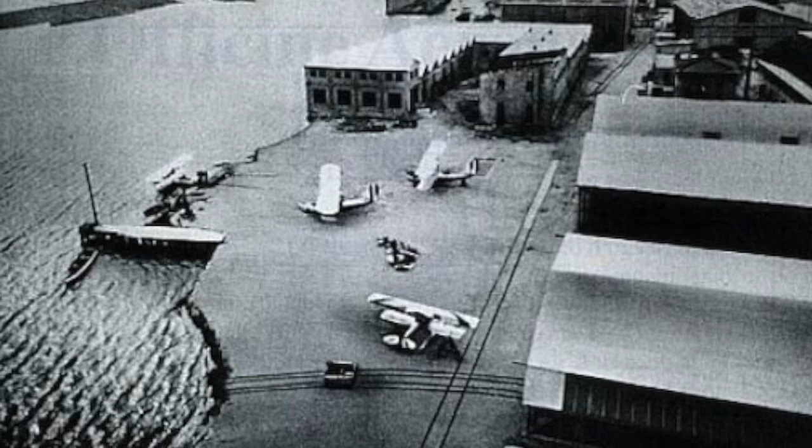The Cant 1007 had an extremely efficient wing, with refined aerodynamic lines and exceptional fuselage connections. Engineer Zappata had worked on other projects before the Cant 1007, all of which were made of wood and always of exceptional quality. At Cantieri Riuniti dell'Adriatico, a small aircraft manufacturer but fueled by top-level technicians, workers, and designers, he had designed excellent aircraft such as the Cant Z501 and the Cant Z506.

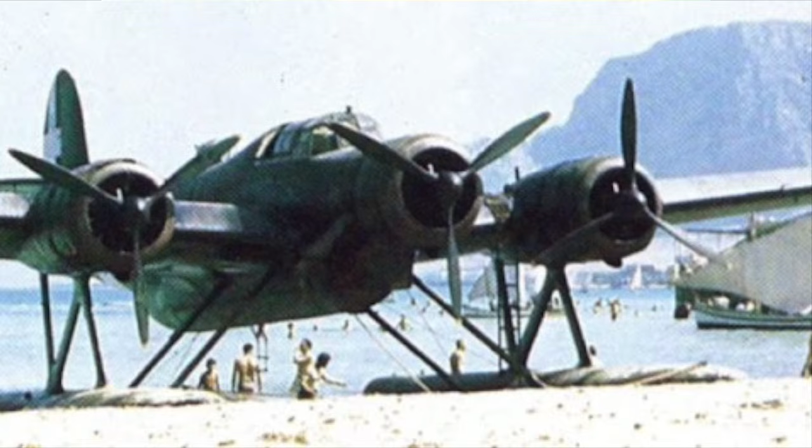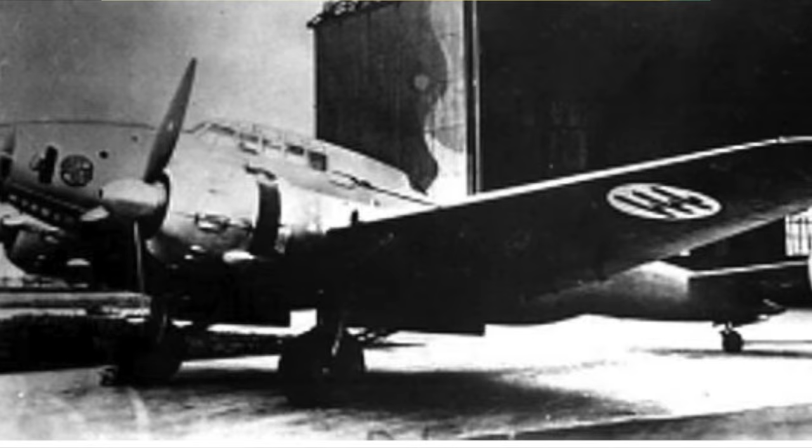The Cant Z1007 was an aircraft that exceeded 13,000 kilograms at takeoff, with a bomb load exceeding 2,000 kilograms. But Zappata had also applied himself to metal construction, again at Cantieri Riuniti, developing two exceptional aircraft, the Cant Z511 and the Cant Z1018. The aircraft took shape in the experimental section of Cantieri Riuniti, while in the Aeronautica Seconda shed the wooden construction techniques that would be used on this multi-engine aircraft were refined.

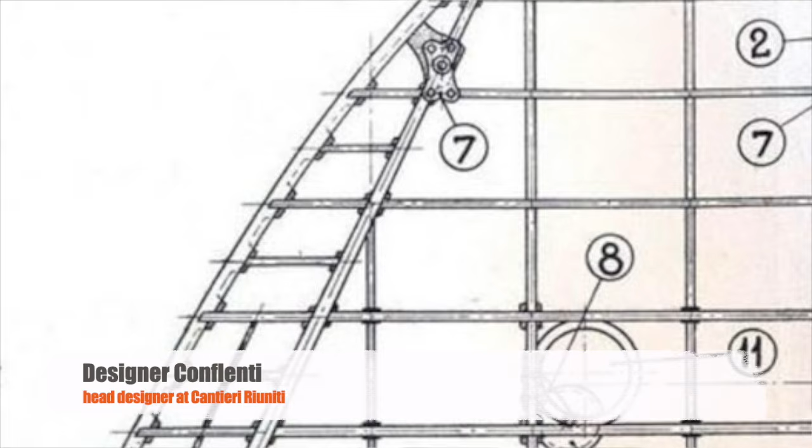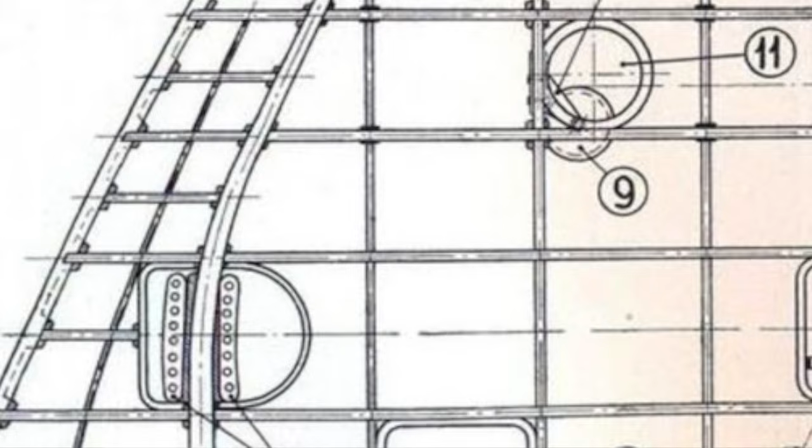Zappata had already worked at Cantieri Riuniti in the 1920s as engineer Conflenti's assistant, immediately after the company's aeronautical design division was founded in 1923. He left a few years later, returning in 1933, enriched by further extensive experience, especially abroad, and, most importantly, now as head of design. The Cant 1007 was a low-wing, three-engined monoplane with a wooden structure.

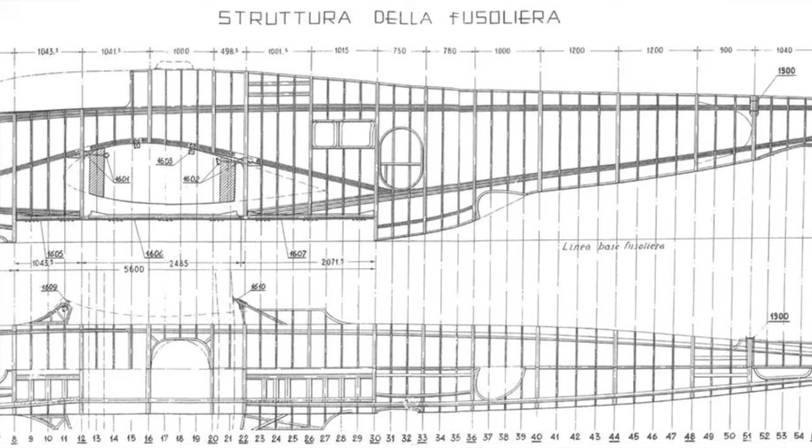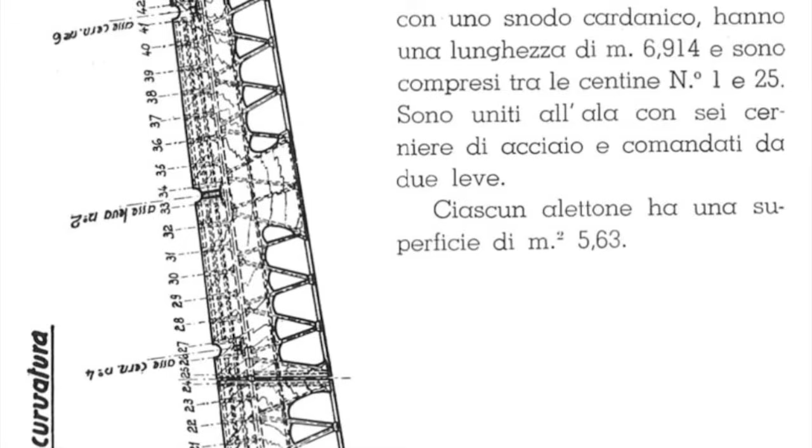The fuselage had an elliptical cross-section, made of wood with tulipwood slats. The two pilots were seated in tandem, to reduce the fuselage's cross-section and improve its aerodynamics. The wing had wooden spars and plywood skinning up to the rear spar. The entire wooden structure was covered with varnished canvas, including the ailerons and flaps, also made of wood with varnished canvas covering. These flaps had been specifically designed by engineer Zappata and were very well developed, allowing for very easy landings, even at steep angles of descent.

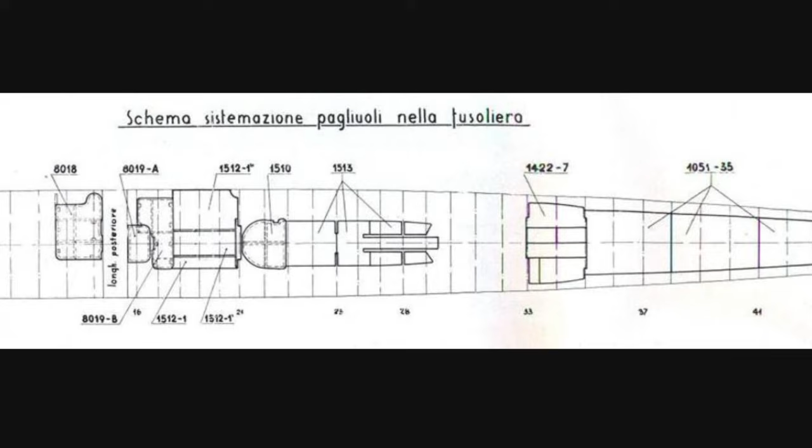The aircraft took off from a runway of just 280 meters, despite its 13 tons of total weight, and landed in 440 meters. Furthermore, in the event of an engine failure, it was capable of climbing to 5,500 meters in 24 minutes and 54 seconds, maintaining good turning ability, as demonstrated by Colonel Torre in Guidonia.

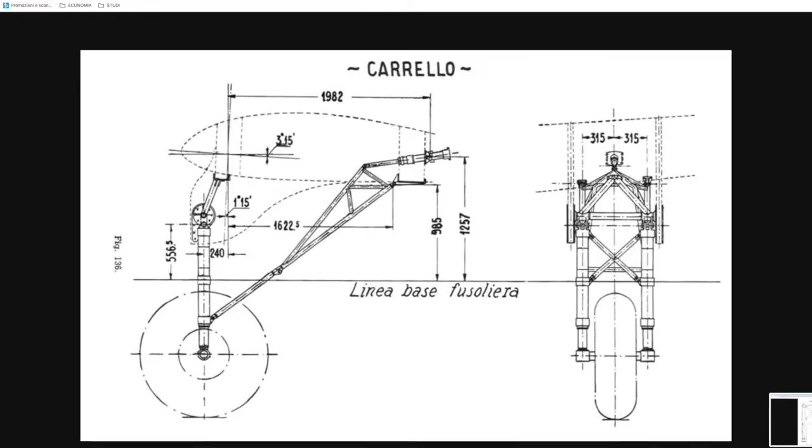The tailplanes and fins, both single and double, were also made of wood, offering excellent performance. The choice of double fin allowed the dorsal gunner a wider field of fire to defend the aircraft, as well as allowing for better directionality thanks to the action in the slipstream of the wing engines' propellers, counteracting the stern thrust. The landing gear was retractable and completely disappeared into the engine nacelles, while the tailwheel was non-retractable. The engines had 3-bladed metal propellers with variable pitch,

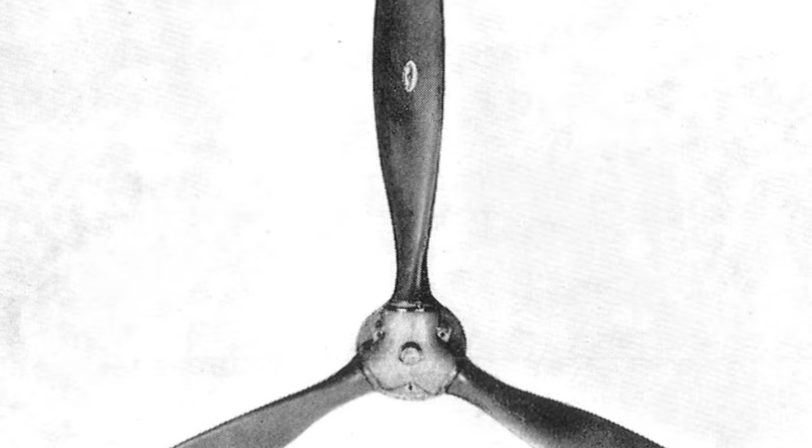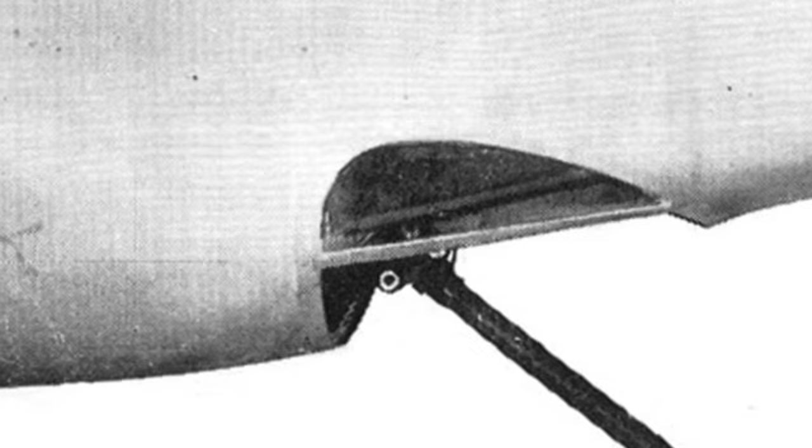electrically controlled. The defensive armament consisted of a 12.7 mm Scotti or Breda machine gun in the dorsal position, another 12.7 mm Scotti machine gun in the ventral position, and two 7.7 mm SAFAT machine guns for lateral defense.

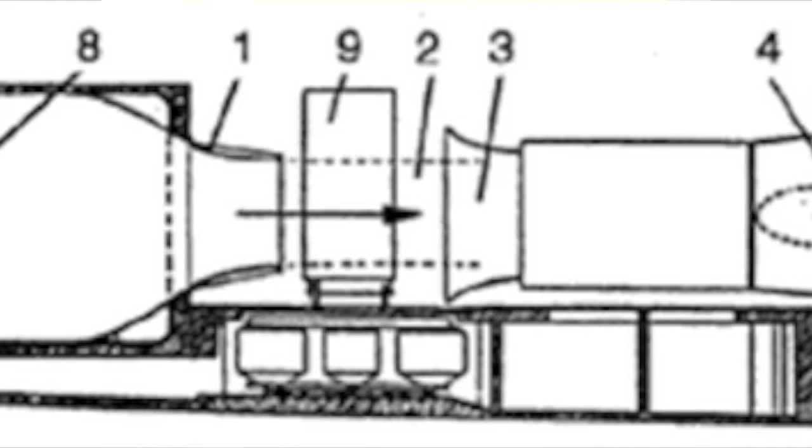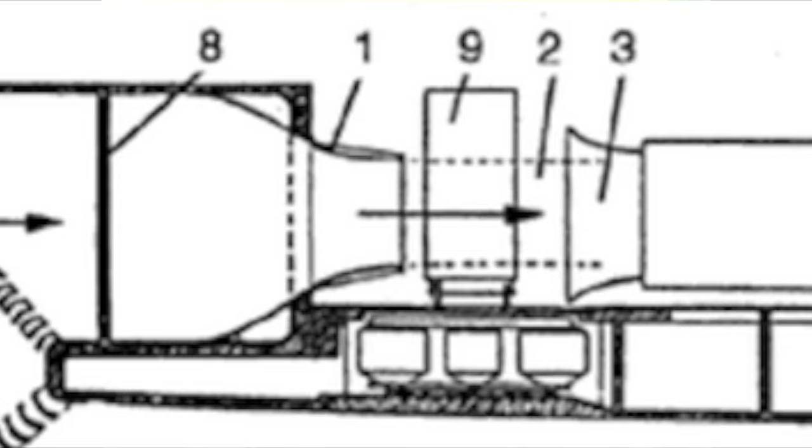Since returning to the company in 1933, engineer Zappata had dedicated himself to wind tunnel studies of various aircraft models, including the Cant Z1007, on which a wealth of exceptional research was concentrated. He succeeded in bringing it to a level of fantastic aerodynamic refinement, studying the optimal wingspan, the desired flight characteristics, the total weight, the engine power curve, the required ceiling, and the maximum range with the optimal fuel load. Zappata meticulously designed and redesigned the wing planform, the wing cone, the spar structure, and the plywood sheathing, demonstrating exceptional skill in structural and aerodynamic analysis.

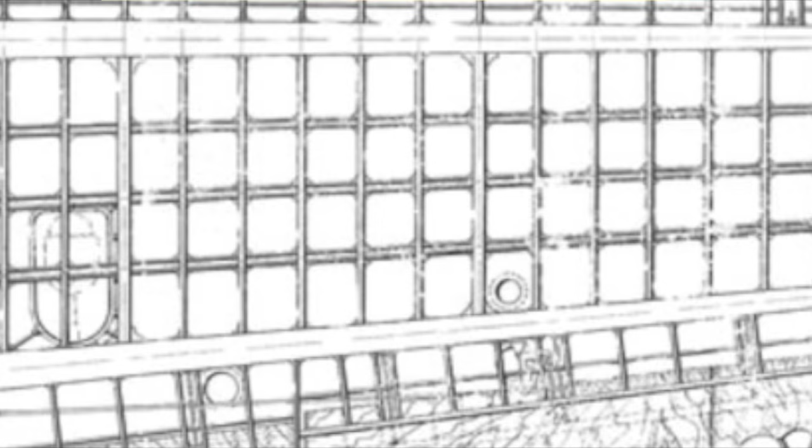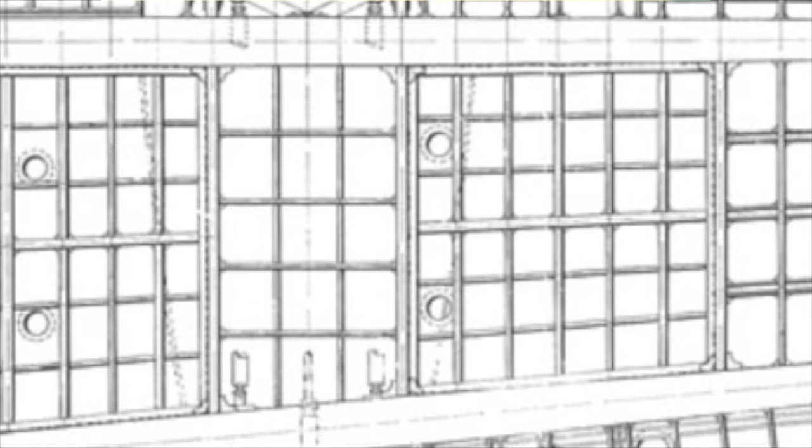This was done to ensure the most straight possible tracing lines for easier spar assembly and to minimize the curvature of the plywood sheathing sheets. He studied the stress along the lines using compression and tension differentials. Particularly sophisticated was his use of the resistant structures of the two spars, and how they effectively transport all stresses in all flight conditions. He also studied how the wood fiber weave was managed to prevent sudden failures, while ensuring that stress peaks were redistributed as much as possible.

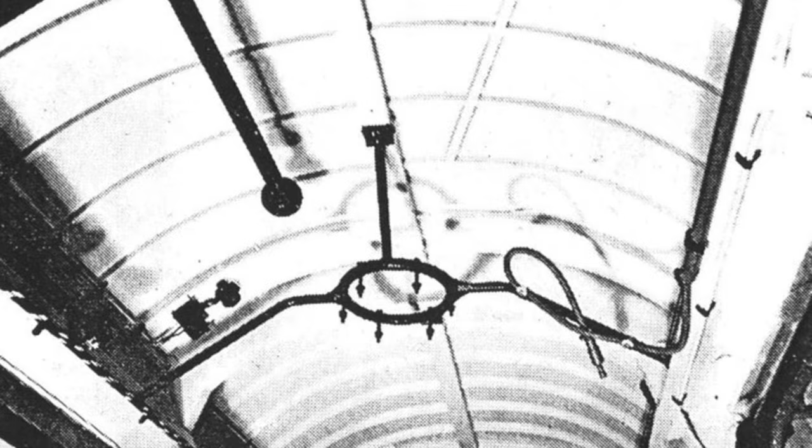Even the elastic axis, that is, the locus of the centers of rotation of the wing sections, demonstrates how accurate the engineer Zappata was in calculating the pure torsional moments and the bending without twisting of the wing. It is also exceptional to observe the accuracy with which the moments of inertia of the spars vary according to the same law, and the elastic axis can be seen to almost coincide with the center of gravity of the moments of inertia of the spars.

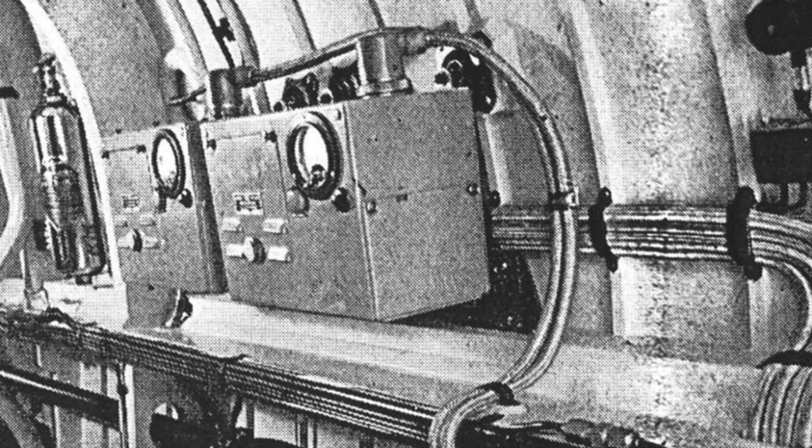And this can be seen even more by examining the data of the static tests where the wing was subjected to a well-calibrated load distribution so as to make each resulting section coincide with the elastic curvilinear axis. Even the average elastic axis of the wing resistance box responds excellently to the differentials in torsional moments, and not by chance. And the sections can be seen to rotate around the axis of the box with minimal deformations, even at strong twisting angles created by force to test its redistribution capabilities.

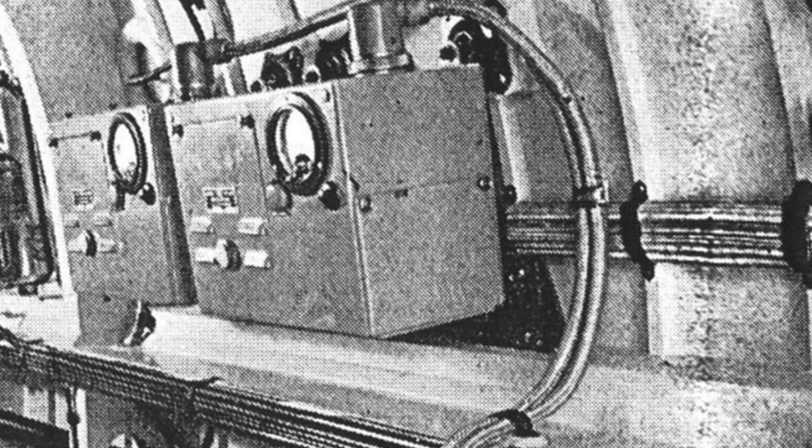If we then analyze the bending moment diagrams on the spars, under all expected loading conditions, we see the excellent result that the sum of the shear forces is almost equal to the resultant of the loads applied to the wing from the tip to the section under consideration, thus avoiding possible elastic deformations between the ribs and the planking. This is enough to trigger Stendhal syndrome. This result speaks volumes about the design expertise that engineer Zappata was able to impart to his projects.

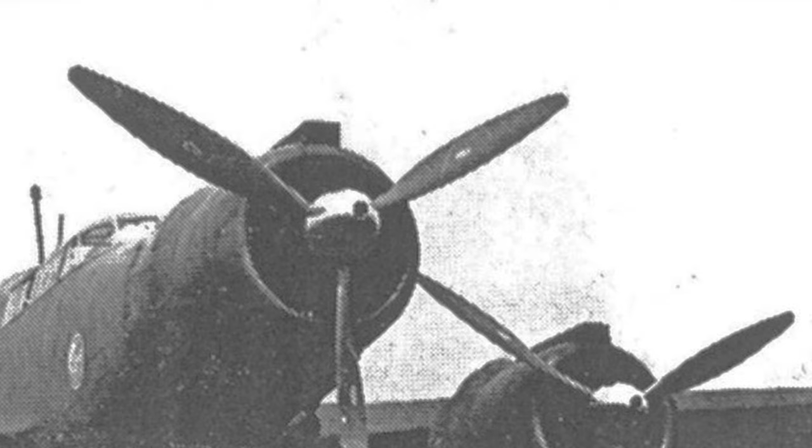The almost identical elastic deformation of the two spars is also remarkable, testifying to the excellent distribution of the concomitant bending. I must point out that this exceptionally balanced and gradual distribution of the torsional moment between the two wing spars could only have occurred with appropriately designed and constructed wooden structures.

While if they had been built in light alloy, including the wing box, this virtuous distribution would have been impossible, inhibiting optimal structural characteristics and requiring reinforcements at various points to manage the resulting peaks in stress and deformation of the surfaces wetted by the aerodynamic flow, especially during maneuvers and with a near maximum payload.

There would be so much more to say, but clearly we'd be talking here for days. So I'd prefer to delve deeper into the subject in a detailed book to truly delve into the soul of this design and construction expertise.

Unfortunately, the Cant 1007 suffered from engine-related problems, both with the original 840 horsepower Isotta Fraschini Asso, which were never fully satisfactory, and with the later 1000 horsepower Piaggio PXI radials, which suffered from serious reliability issues. Engineer Zappata completely redesigned the aircraft to take advantage of this increased power, expanding the cross-sections, the engine nacelles, and the front fuselage with additional wind tunnel testing.